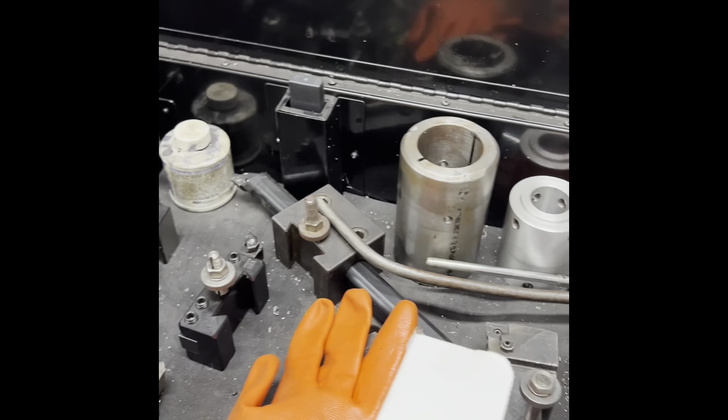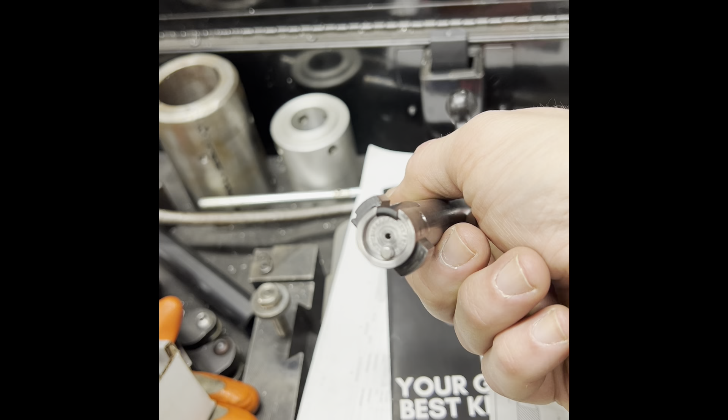So today I wanted to do a quick video about something that I'm finishing up. So I'm gonna flip the camera around. So we did an M16 extractor installation on a Remington 700 7mm magnum bolt. Just a Badger Ordnance extractor. It comes with a good set of diagram instructions here. It's got all the measurements on it.

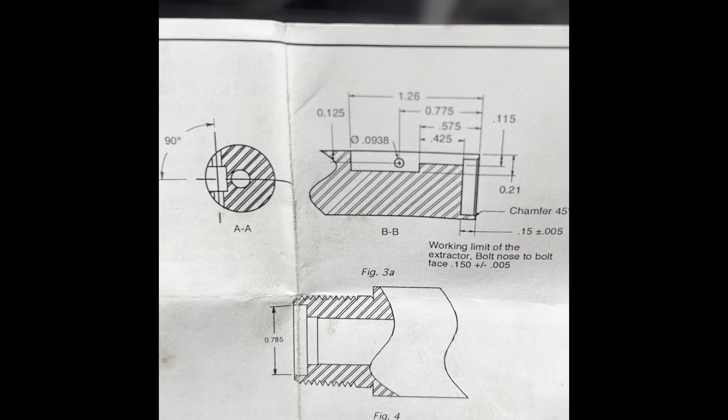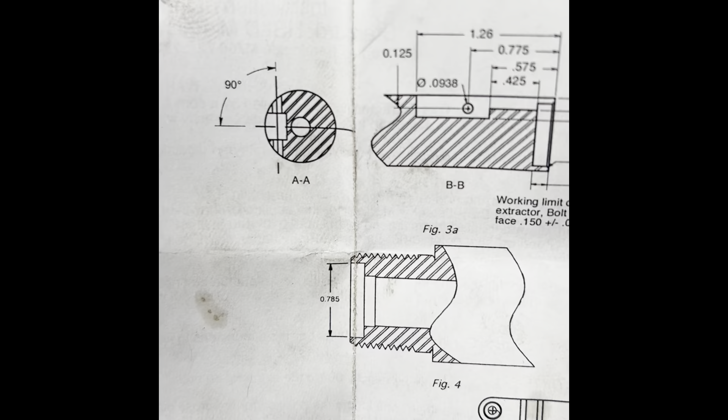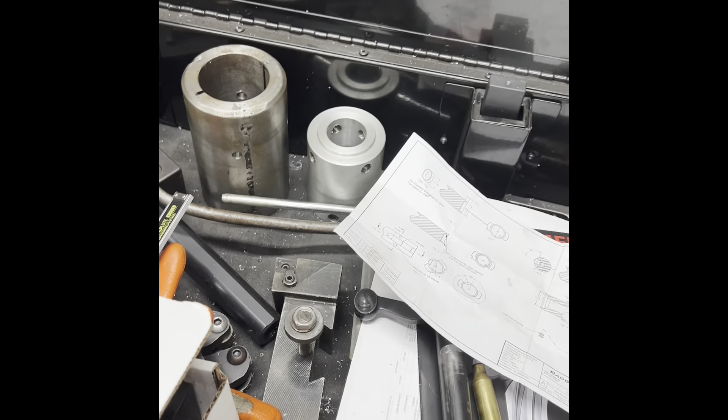The one thing that you have to account for with these, that I'm not aware that you have to account for with the Sako style extractor, is the bolt nose recess. In that drawing in the middle of the page, that is a schematic of the barrel tenon. It should be this piece right here where the chamber's at. That is at about 720 thousandths from the factory, and we got to open it up to 785 thousandths so that the extractor can snap around the back of the cartridge.

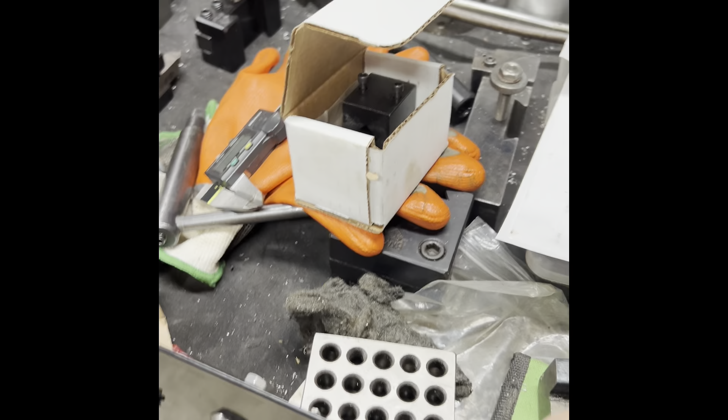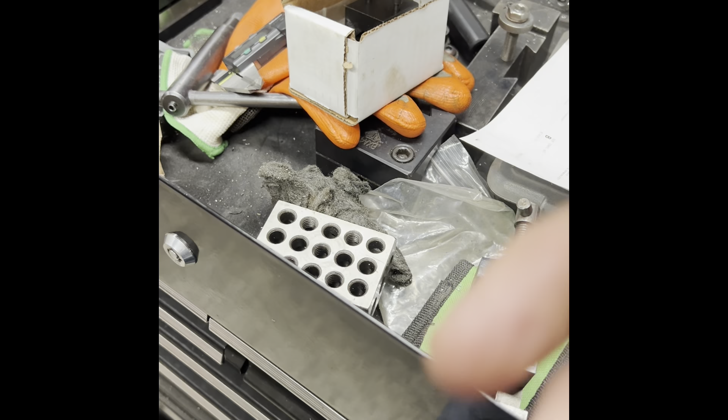I'm shooting with my phone today, so I'm gonna have to do a lot of things one-handed, so forgive me a little bit. But if you'll notice this extractor, as the shell snaps in there, that pushes up, and from the side profile you'll see it's got to come out a good bit to snap around the cartridge.

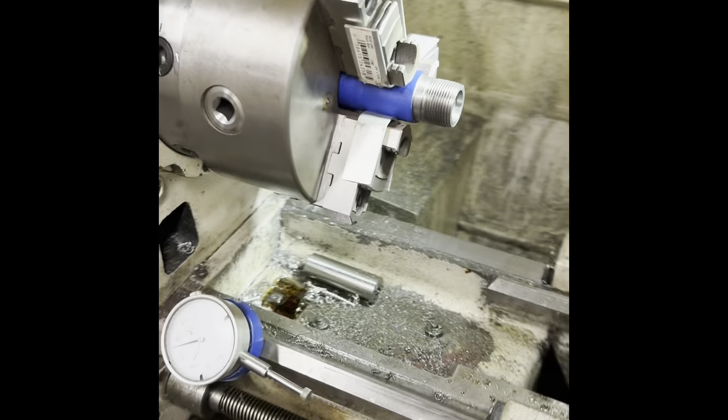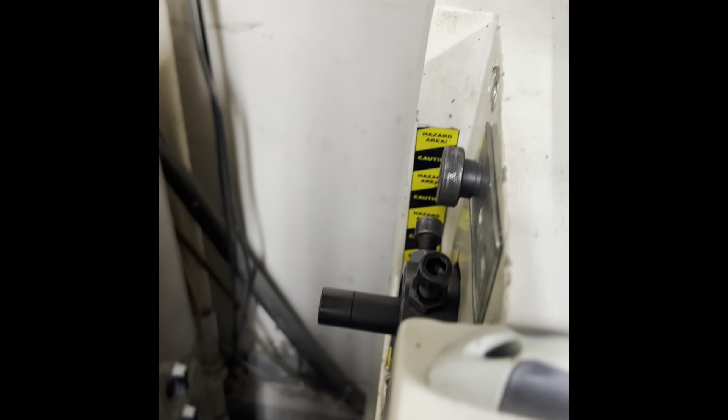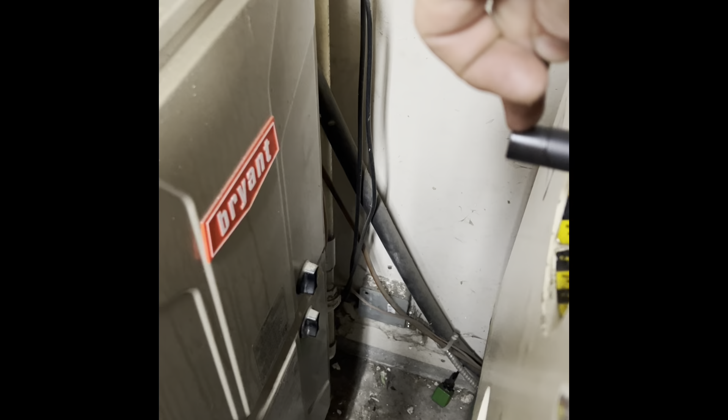I've got this chucked up on my lathe. I'm using a 3-jaw chuck because this is not a super critical feature. It doesn't touch the bolt nose, it doesn't touch the recoil lugs, it doesn't determine how straight the brass goes into the chamber. Got some aluminum jaw pads, and the barrel's wrapped in painter's tape to protect the finish. Over here I've got my spider supporting the muzzle end so it's not flopping around, and I dial indicated this in off of the thread protector to within 2 thousandths runout.

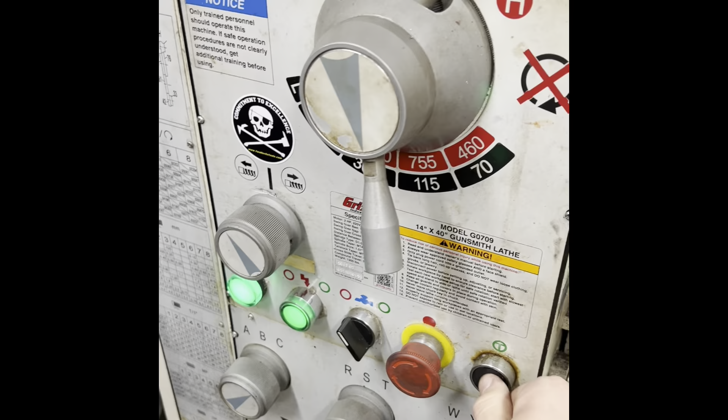So we're going to go ahead and get this machined out, and I'm going to do my best to film that with my phone. So here we go. We got our machine set. I'm going to change my speed to 755 because this barrel is stainless, and stainless likes faster speeds. Okay, she's working. We're going to come in, get a touch. We're going to machine that out 60 thousandths. I'm going to put some Sharpie marker in here.

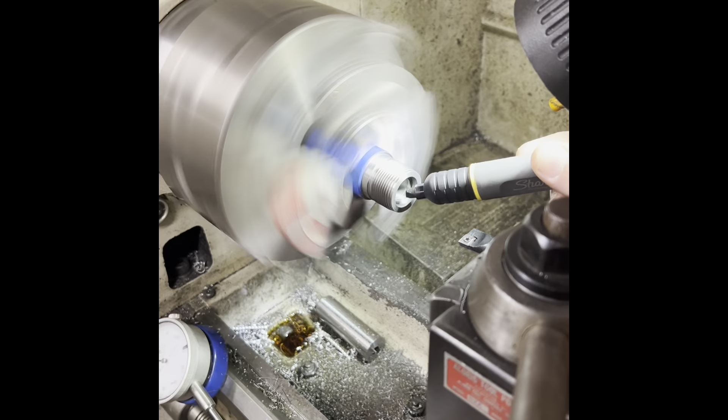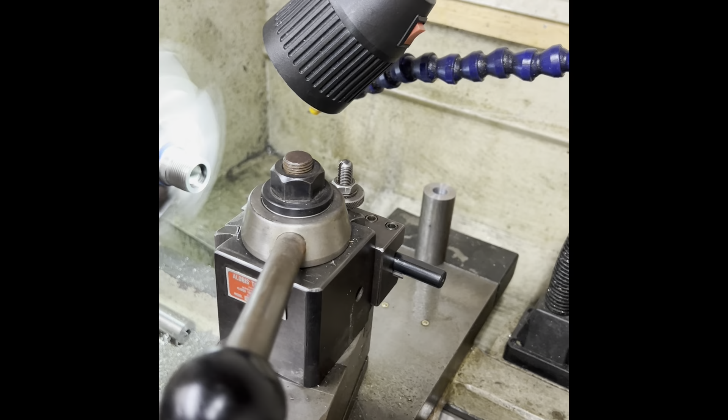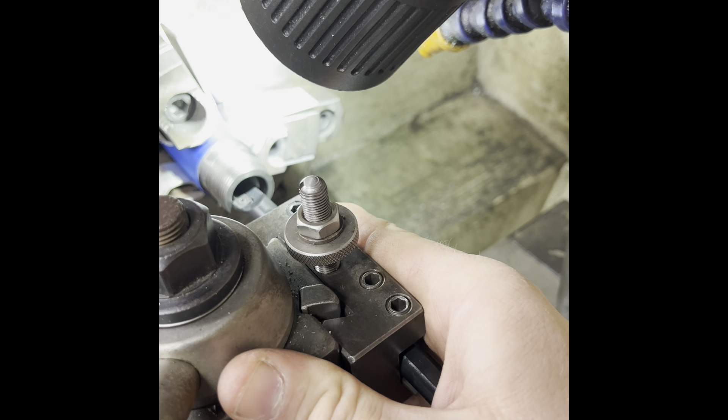Okay. One thing I got to do is get my cutter here on center. Sorry, pulled you away there for a second. Okay. So, all right, now we're on center. We can get our touch.

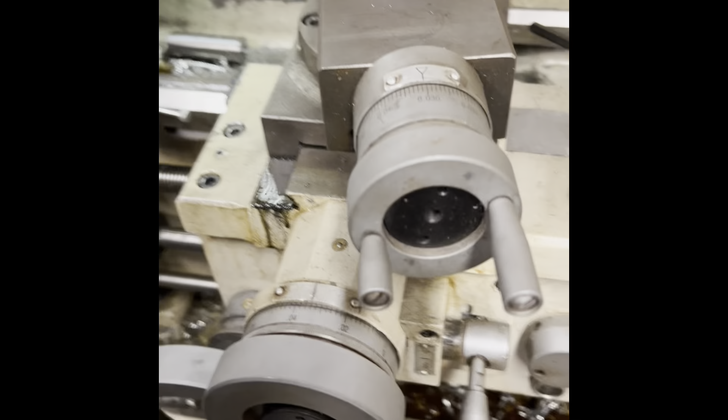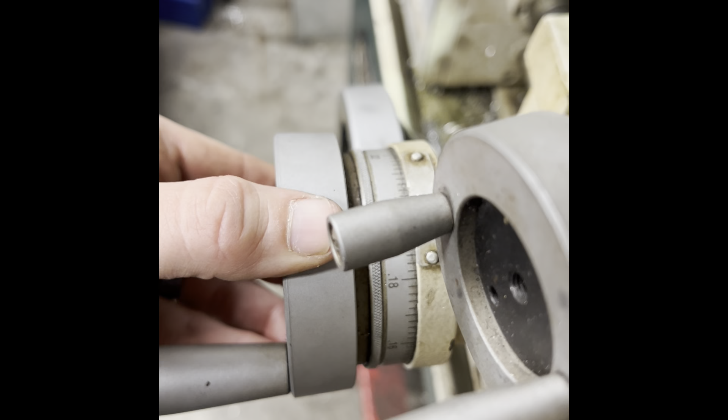I gotta set this thing. Had to zero my dial. Okay, so we're gonna come in 20 thousandths. And after I get my initial depth here, I'm going to mark it with my dial indicator there. Set up, capture my zero, and come out another 20.

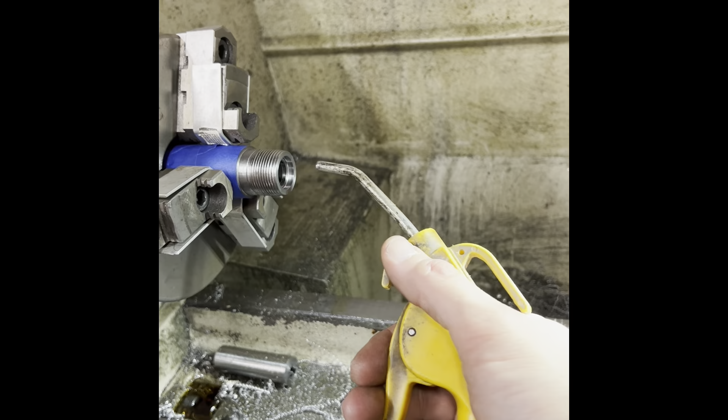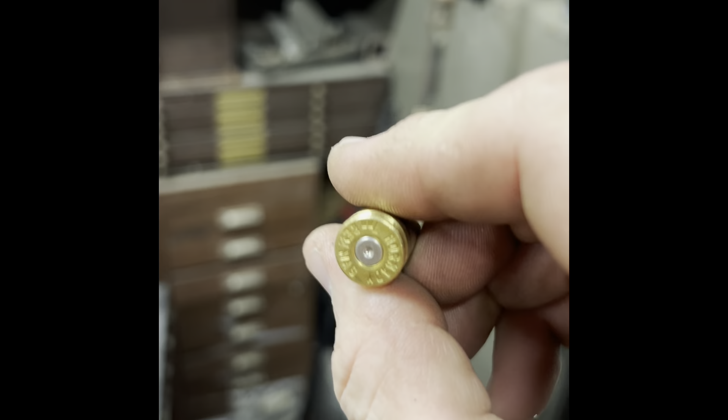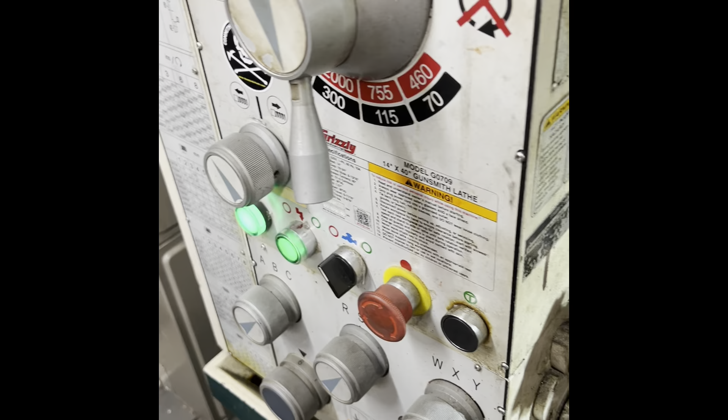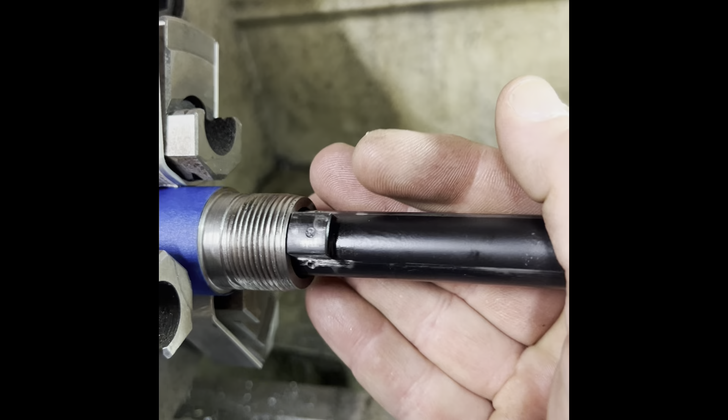Okay, now we have a 7mm mag case. Put it in our chamber. Take our bolt here, and I know it's still got the extractor in it. I should probably take that out, but nah. All right, that snaps in good. So I want to take out another 10 just to be safe.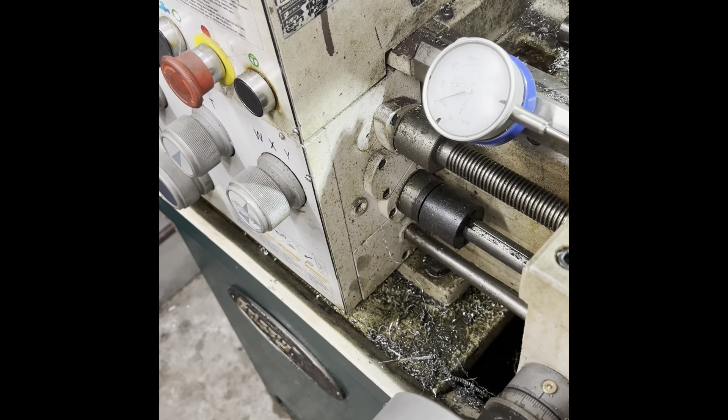We're going to measure this because the spec sheet says 785. We're at 761. Okay, 762, 750. Okay, we're going to take out another 10, just to be safe.

Sorry for making you guys sick with the moving around and everything. Okay. Probably not going to change anything. Yep. Okay. All right, I'm going to cut this off here and put the barrel back on, and then I'll show you the test fit after the barrel's back on the action.

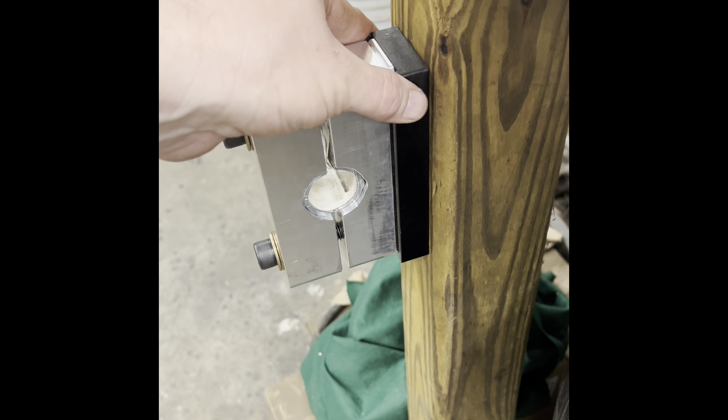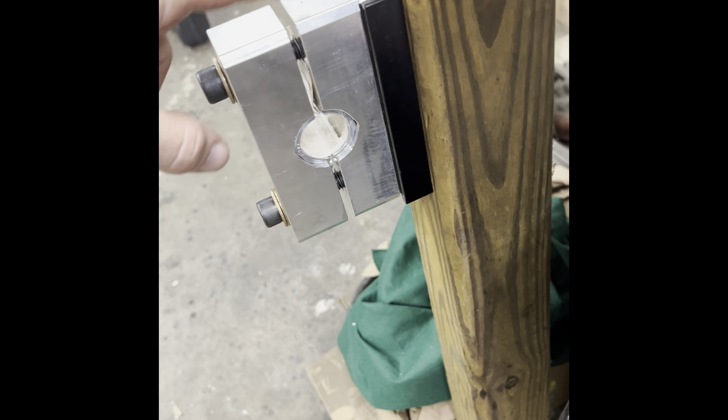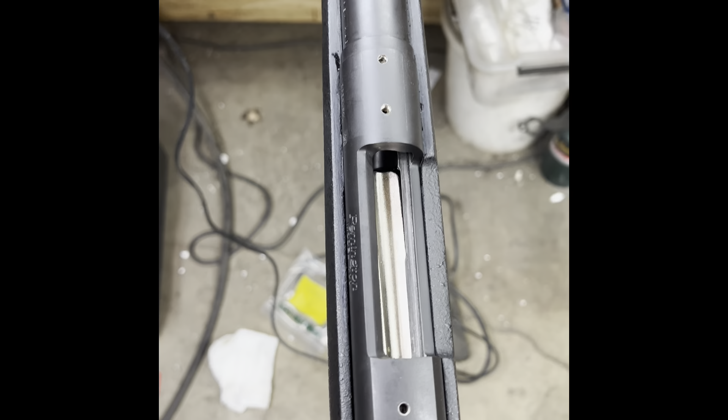So like I said, I'm going to shut this off, and I'll bring you back as soon as I get the barrel back on the action. Okay, and we're back. Got the action all put back together. It's in the rifle. This is just a good rifle. He's got an aluminum bed block in there.

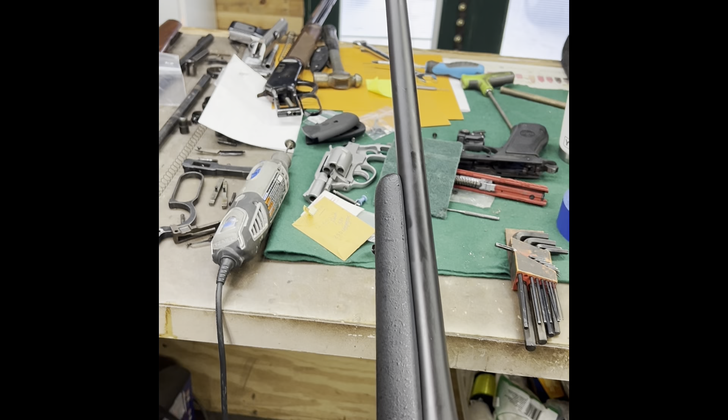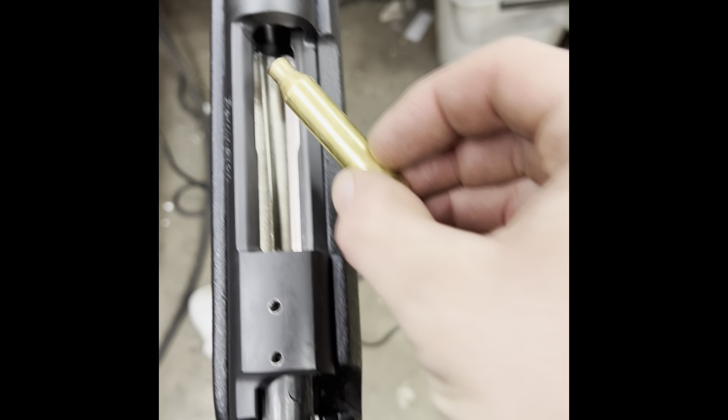Rebarreled it with a, I'm not real sure what brand of barrel that is, but it's a good thick profile. So anyway, we're going to put our spent casing in here. Yep, and it ejects just fine and grabs it.

If this is something that you'd like to learn how to do, I know I didn't take the time to video the process, but Wyoming Gun Company is the name of the channel. He's got some really good videos, and this M16 extractor install is one of those. I wanted to do this side of it because all the videos that I've seen about this did not include the machine work to make it fit inside the bolt nose recess.